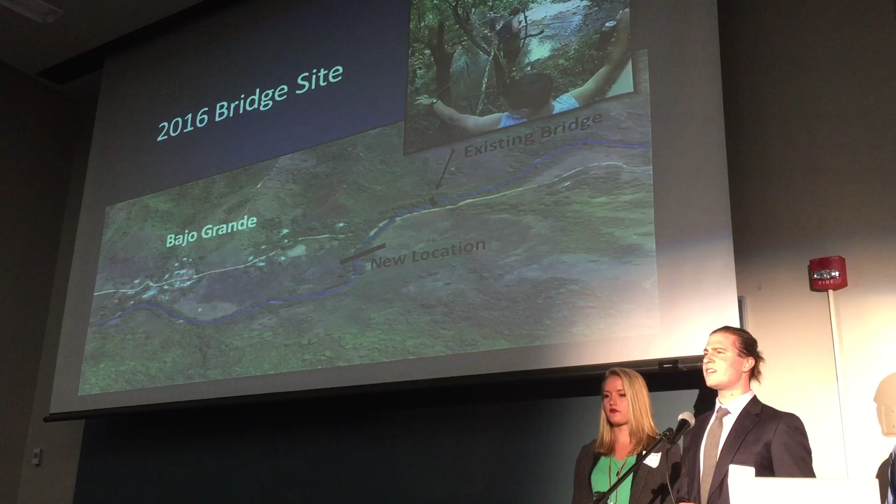In our initial site planning, we chose to change the location of the bridge, and you can see that change on the map. Where the existing bridge is, it's at the base of a hill, and the terrain has posed some design challenges for the subterranean construction, and then also achieving an acceptable height differential between the sides. So the new location provides enough space for construction and also a desirable bank elevation. I'll pass it off to Katie and she will talk more about the bridge design.

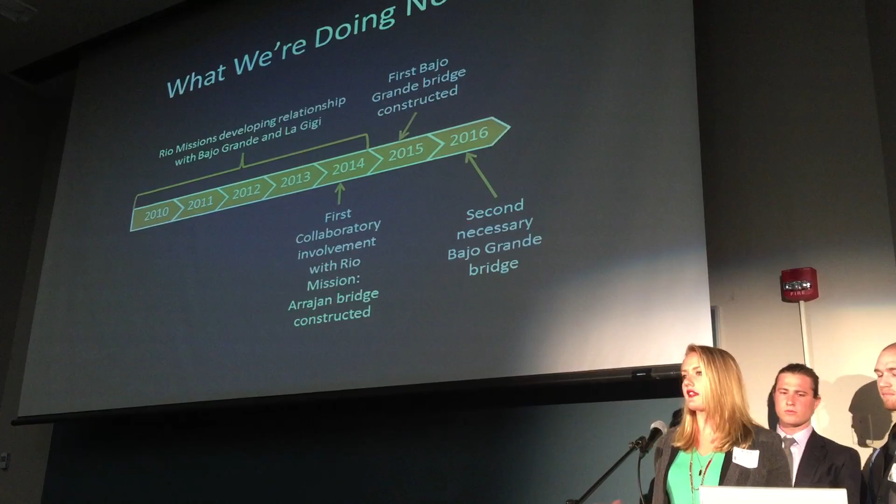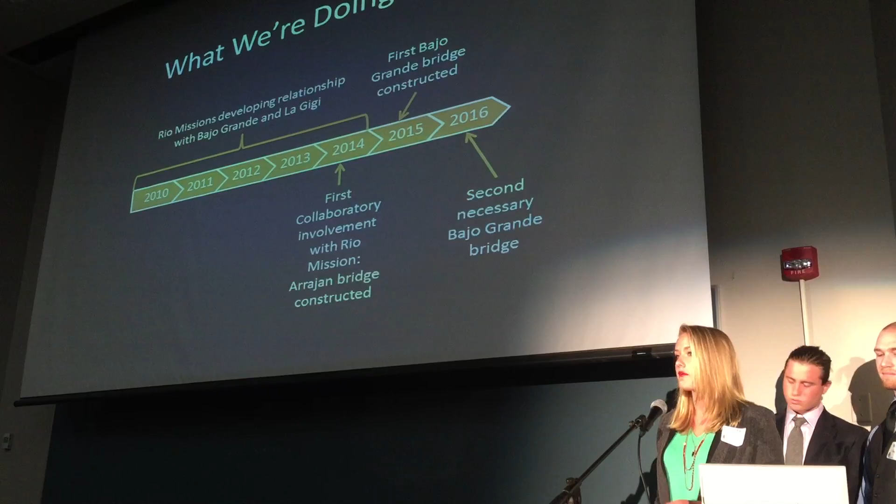So here's the timeline of our project as a whole. Rio Missions has been developing this relationship with the community for a long time, and we came in 2 years ago to construct our first bridge, and then built the first bridge for Bajo Grande last year. And this semester and this year we've been working on the bridge design for our current bridge, which we'll construct this summer for a 7-week construction project.

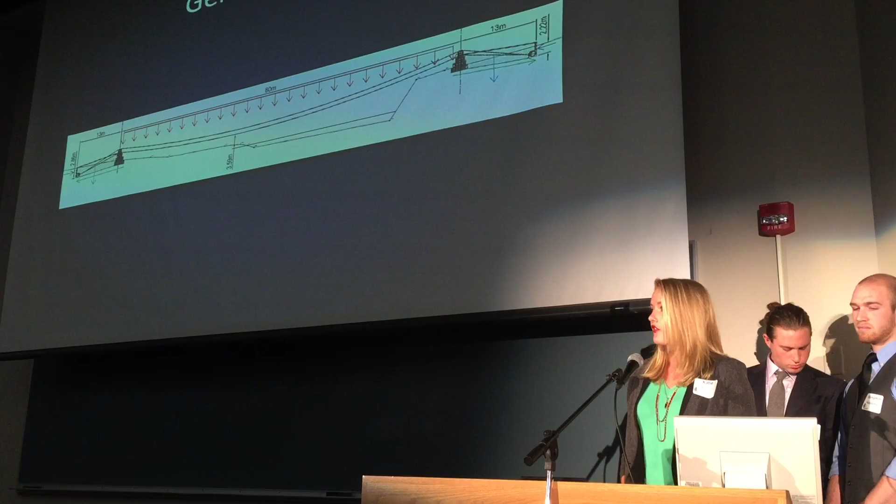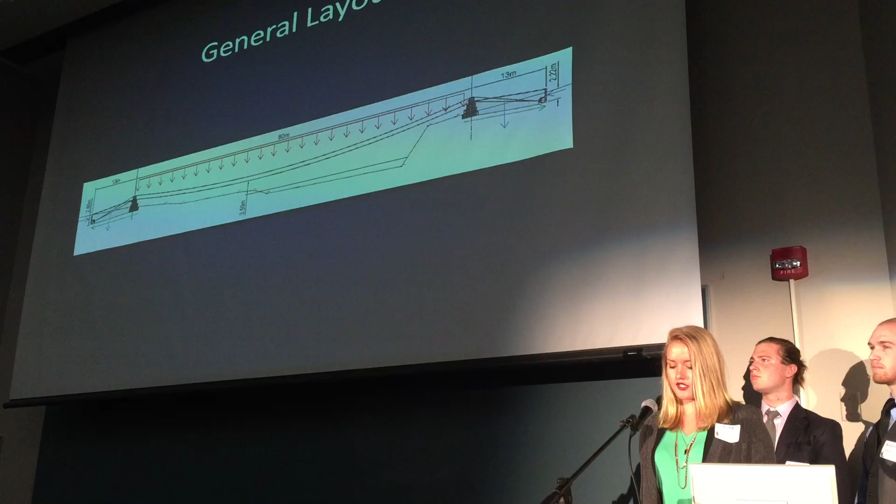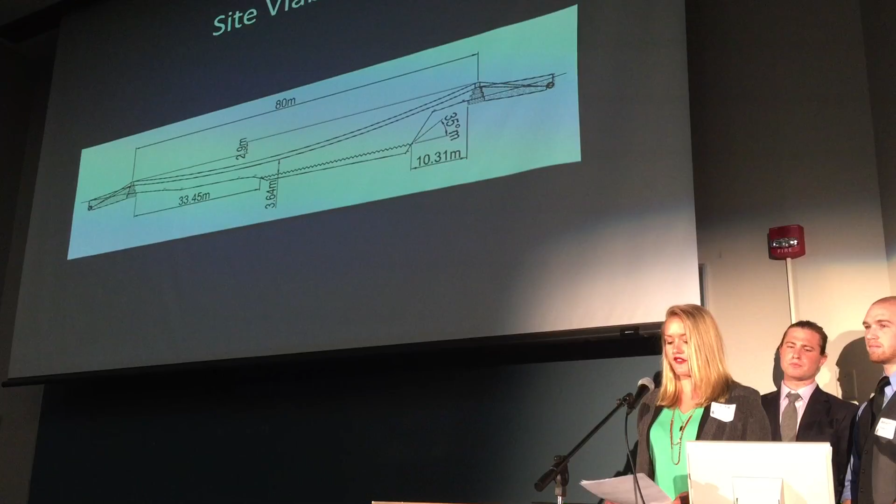This is a general free body diagram of a bridge of our magnitude. The basics of design of a bridge of our magnitude is to have enough friction force to resist the cable tension provided by the distributed load over the span. The first step of any bridge design is to determine the site viability and the dimensions of our site. We'll have an 80-meter span, which is about 260 feet. The length of the span and material accessibility to the site necessitated that we use a cable suspended bridge instead of the wooden truss bridges of the past.

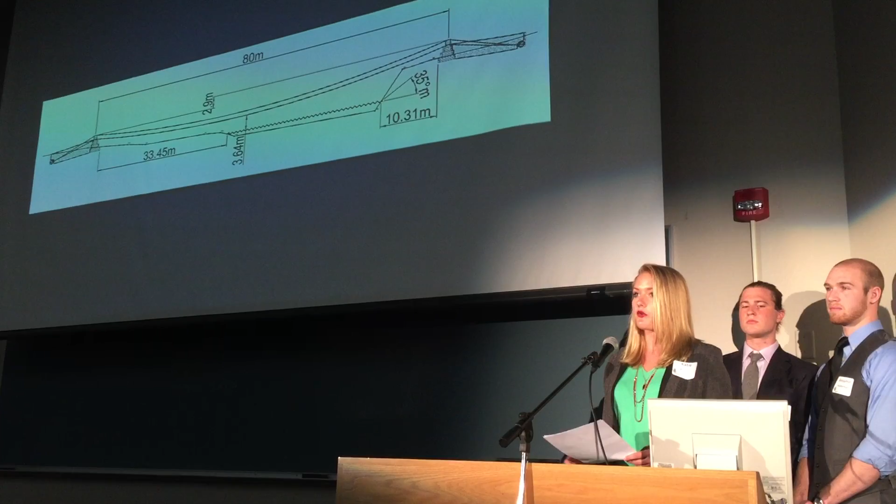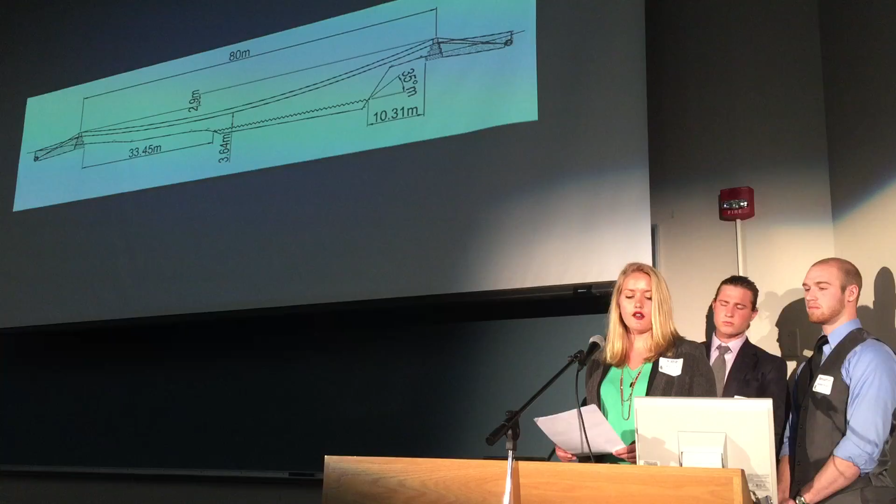Also, with our current site, we needed to make sure that we had a setback more than 35 degrees from the bank of the river, and also a height difference which is less than the length divided by 25, which is 3.2 meters. And our height difference is 2.9, so we easily cleared that. We also needed to make sure that we had enough freeboard, which is the height of the bridge above the high water line of the river, over 3 meters, which is the minimum height differential for a gorge type location. The demand on the bridge abutment is mostly from the cable tension.

Our decking is guayacán, which is the hardest wood in the world. It's also nice because we can locally source it from the mountains of Panama. We have a crossbeam every meter supporting the staggered floor beams, and we found our service load to be a combination of dead load and live load of 85.2 pounds per square foot over the span of the entire 80-meter bridge. This is enough for a person to safely walk their horse across the bridge.

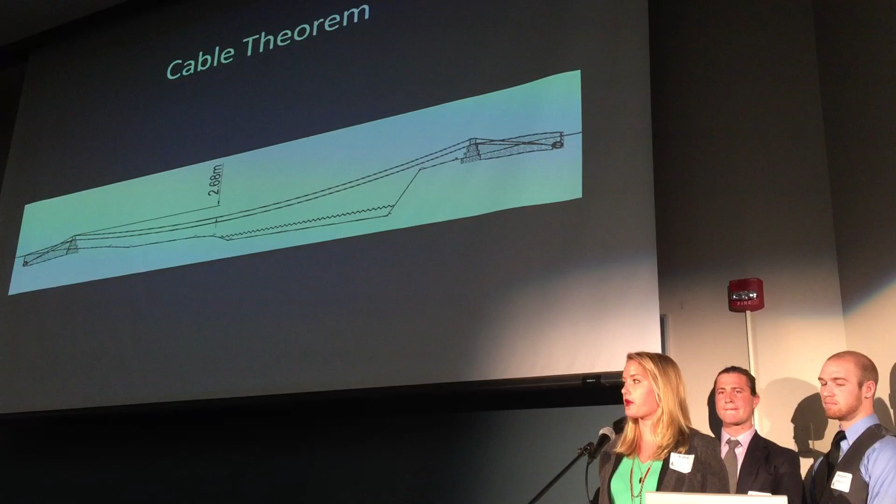We use the sag value of 5%, which is an amount that's been proven efficient in the past. This value is important because if our sag is too tight, then the cable tension will increase drastically. And if the sag is too loose, then it will move too much when you walk across it.

After finding the maximum axial tension of the bridge, which is 66.5 tons, we use the breaking strength of a bunch of different cables with different diameters to determine how many and what kind of cables we would use. We determined to use 5 1.25 inch cables, which have a breaking strength of 58 tons, to span across the bridge length. This gave us a comfortable factor of safety of 4.36. The cable size is also nice because we have a couple remaining 1.25 inch cables on site from the bridge construction last year.

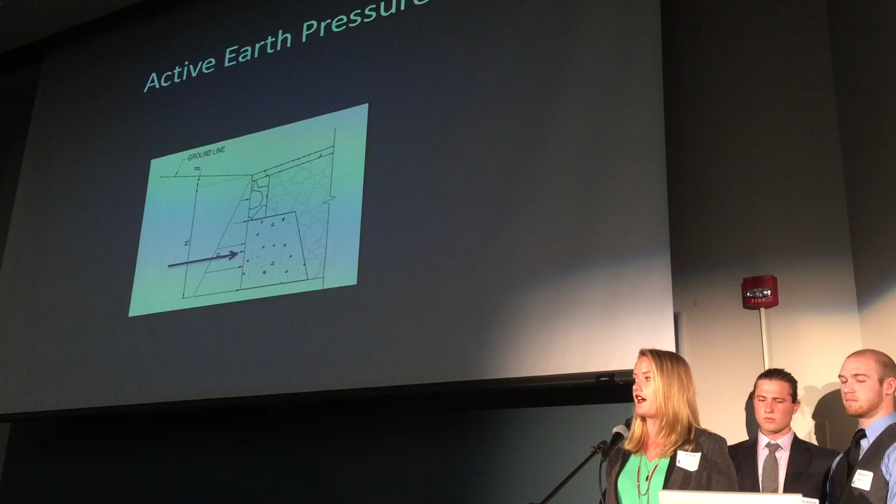In addition to the large magnitude of the horizontal force component from the cable tension, we also have some pressure from the earth pressing on the back of the anchor. This is called active earth pressure. With our current soil density, the total force is 8 tons, which is relatively small compared to the 67-ton cable force of the span, but it still needs to be accounted for.

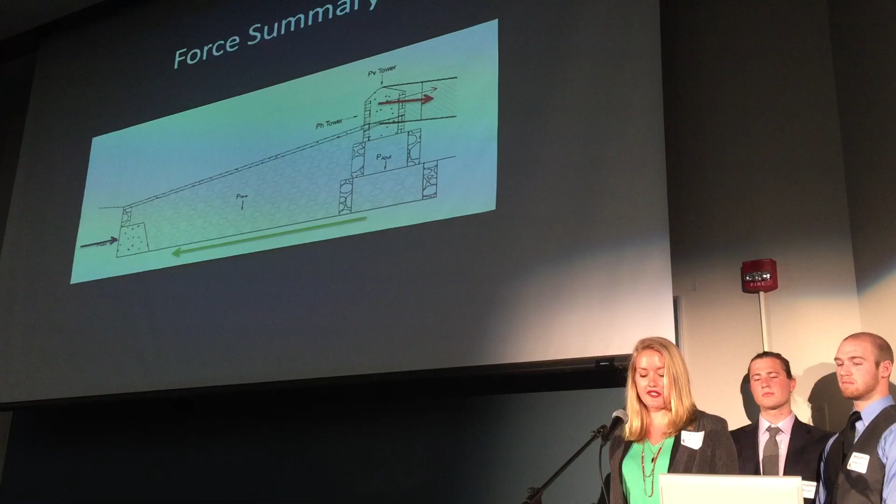And again, the only way to resist a horizontal force in a bridge is to have enough friction force to resist that. And how do you get enough friction force? Provide a lot of normal force. This is all from the weights of the abutment, ramp, and anchor.

First, we have a masonry wall foundation filled with rocks and soil over a concrete slab and capped by a 10-centimeter concrete slab. Sitting on top of this are the block wall tiers. The slab has a hole in the middle so that the fill of the tiers and of the tower and of the foundation can act as one entity, providing a greater structural advantage for the abutment.

Last year's bridge only had 1 tier, but this year's bridge will have 2, which provides some significant construction time constraints. The towers also have masonry walls, but are filled with reinforced concrete, capped with a concrete cap encasing a tire rim to saddle the cables of the handrails. There's a reinforced concrete anchor with tubing through it for the cable to run through.

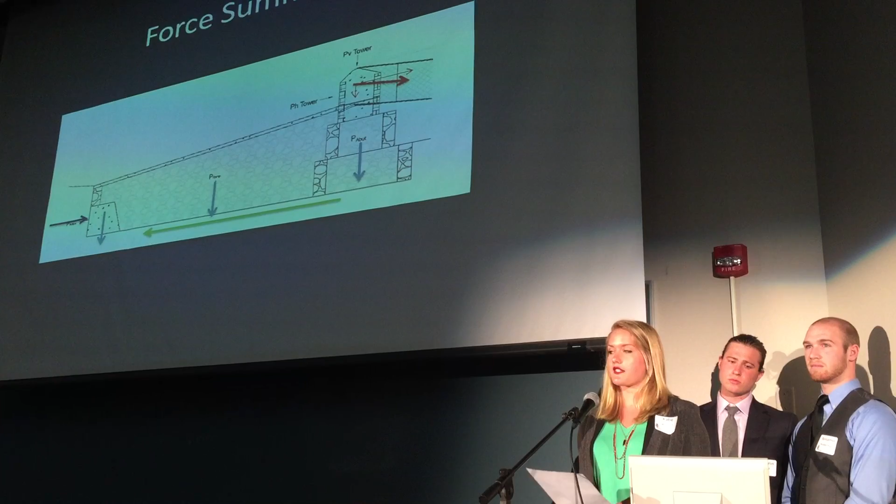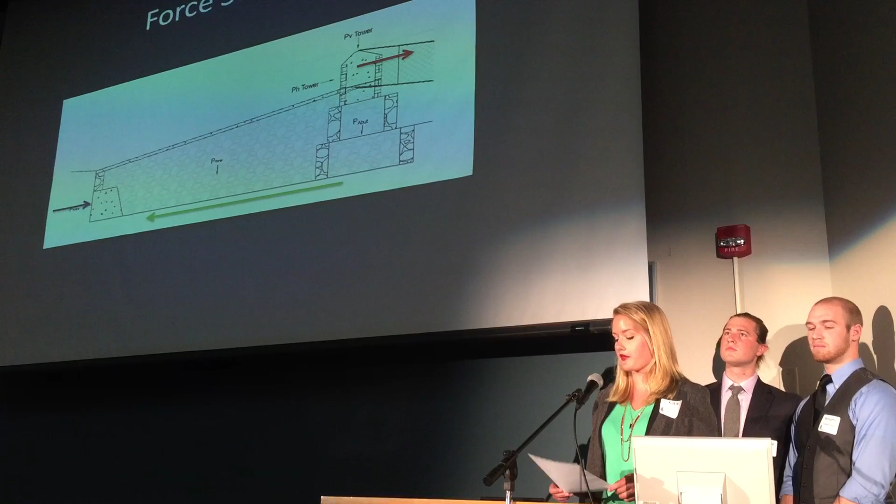The ramp walls are structural, made of river rock, while the entire ramp is backfilled with the previously excavated soil. The entire weight of each abutment is 329 tons, comprising mostly of the ramp walls and fill. In addition to the massive structural pieces, a small amount of vertical force is provided by the cable tension. With this design, we did have enough frictional resistance to exceed the horizontal component of the cable tension and the active earth pressure by greater than 80%.

The Collaboratory gives us, as students, a special opportunity not only to design, but also to make our designs a reality. In addition to the design work we've completed, we have also done a lot of work planning for the construction of this new bridge. This past January, we sent a team of 2 students and an advisor to Panama. The team had 3 goals.

1, to prepare the bridge site for the summer construction. 2, to begin material collection of river rock, sand, gravel, cement, and any other type of building material that we may need. And 3, to get the community excited and ready for the construction of this bridge. This goal is important for the success of the project because without the help of the community, we would not be able to complete this bridge. Overall, these goals were to help Rio Missions with any responsibilities needed to be completed in order to prepare for the summer travel teams.

In addition, we've been working on preparing as a team here at school. We've designed a construction schedule using a Gantt chart, which is commonly used by many construction companies here in the States. This schedule outlines critical phases of the project that need to be completed in order to stay on task to finish the bridge. We have set 7 weeks for the summer trip. Therefore, this restricts the amount of time we have to build, making it more important that we do our best to stay on track according to our schedule in order to finish before we leave country.